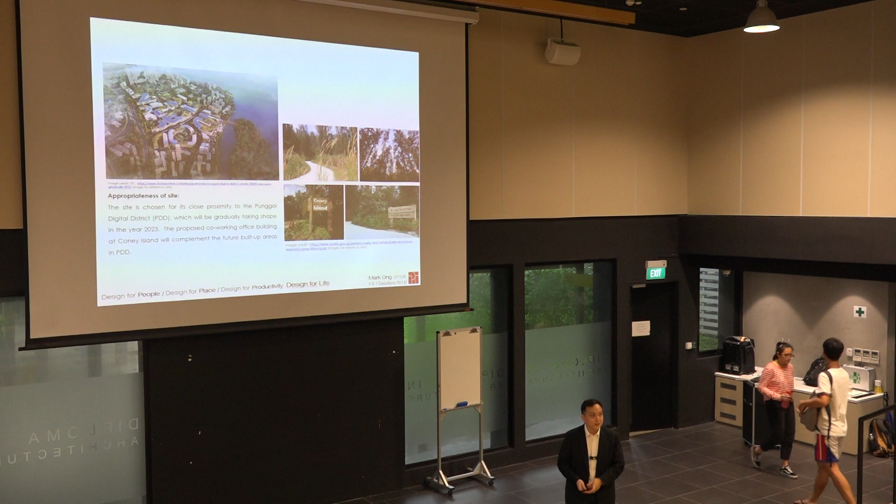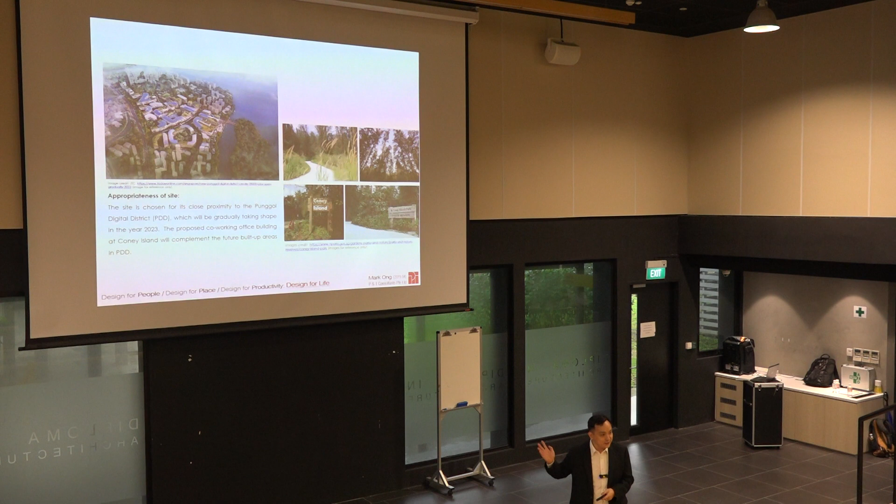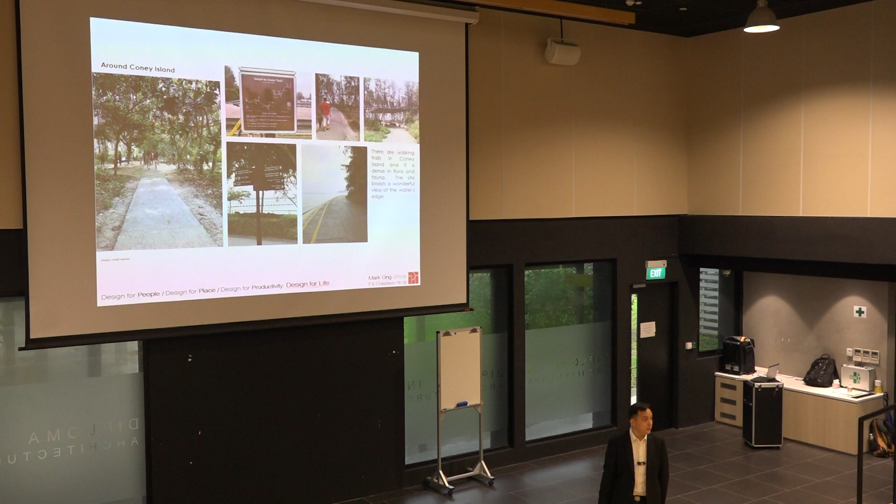Or people will also probably be cycling or jogging to work, and probably would enjoy having a shower facility if they jog or cycle to work before they begin work in a place like this. So it's actually some distance, and I think these are all included in your brief for the design competition.

This reminds me of a project which we won via design competition. It's a public housing project, we did it for HDB. It's located in Tampines. In Tampines now, they actually cleared out an open green area to plan a new neighborhood in the northern end of Tampines, which they're calling Tampines North.

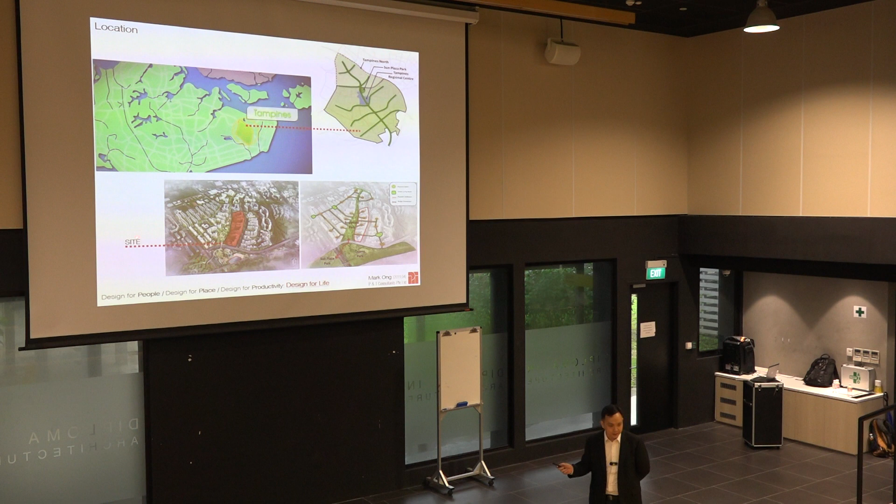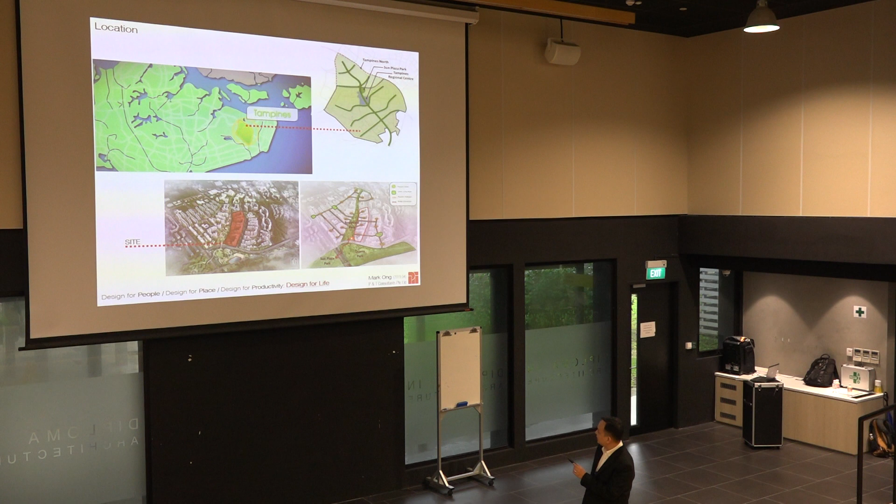One of the things the housing board is doing is designing a linear park, which they've called the Boulevard Park, that will stretch to another park connected to an existing park called Sun Plaza Park. So is anybody here living in Tampines or familiar with the area?

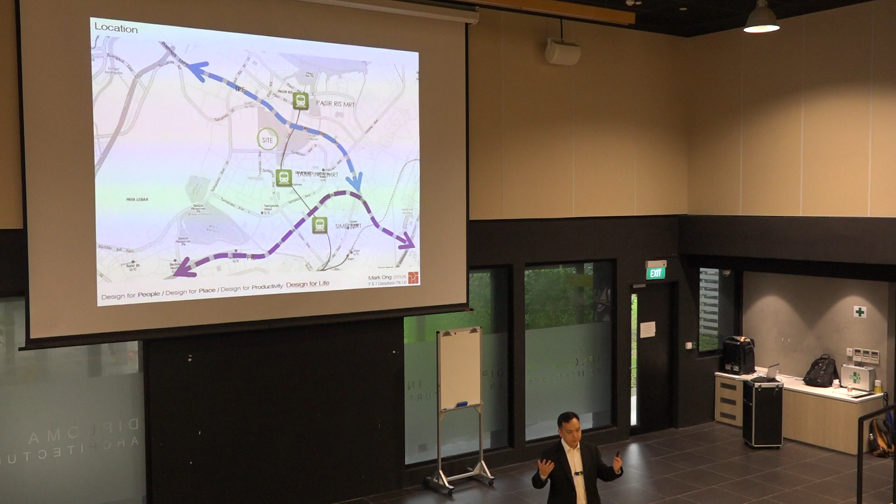The site is actually some distance from the MRT station in the town center. So it's one of those places where, if I was going to live here, it's probably the kind of place where I would use a bicycle or a PMD to get to and from the MRT station in the town center. That's why I thought it's appropriate to use this project to illustrate how certain ways of getting to and from a site would be useful.

So this is the site, from the URA master plan. This is the site, this is the linear park that they have planned, this is another park they are planning, this is Sun Plaza Park in Tampines, and here you see Tampines Town Center.

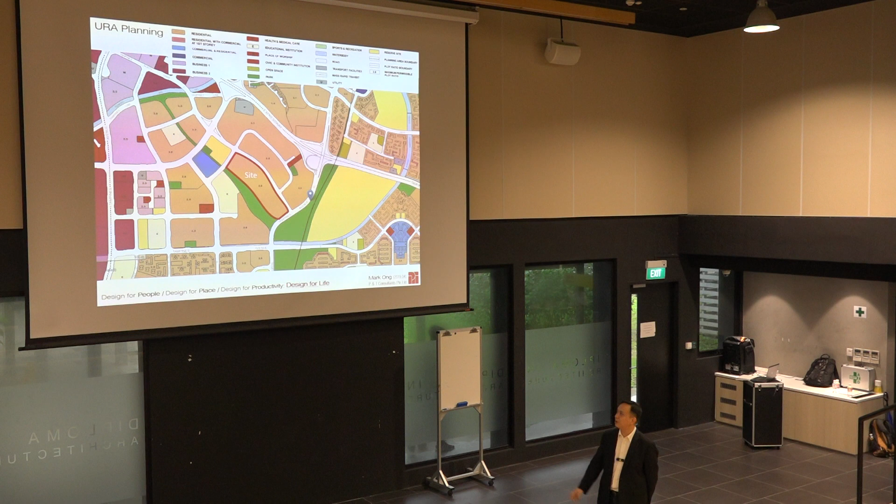So it's probably a 15-20 minute walk as well, or if you're using a bicycle. We thought a lot about how one goes to and from the site when we were designing it during the design competition - what is the experience of going from the town center and, let's say, using one of those bike sharing platforms to go from the town center to go home.

So when we were designing the site, we thought about it in a few ways. First, of course, we enjoyed the frontage - this is our site, we enjoyed the frontage along the Boulevard Park itself. And so what we wanted to do was create our own secondary boulevard park within our site.

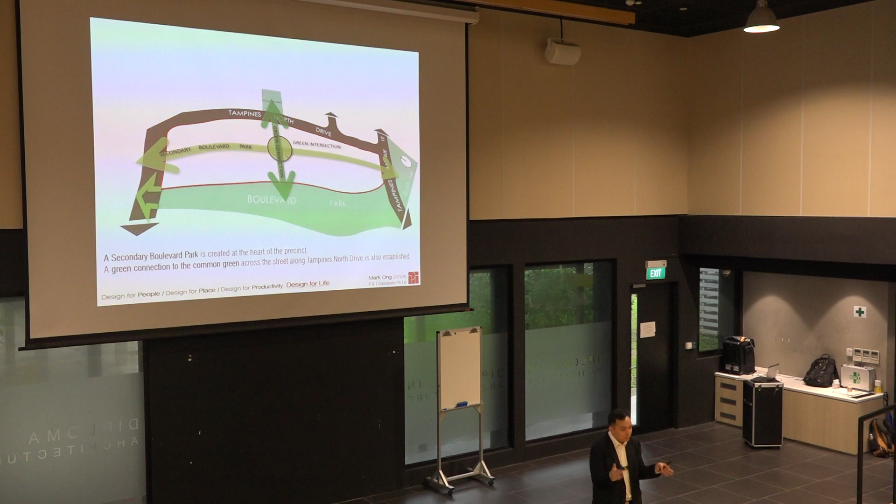We also found out that the housing board was planning to build a common green across the street, so we decided to build a green connector that bisected the site to create an intersection. But we did not want this path to be just a path or a small narrow walkway - we wanted it to be a space wide enough that you can actually define the space with buildings.

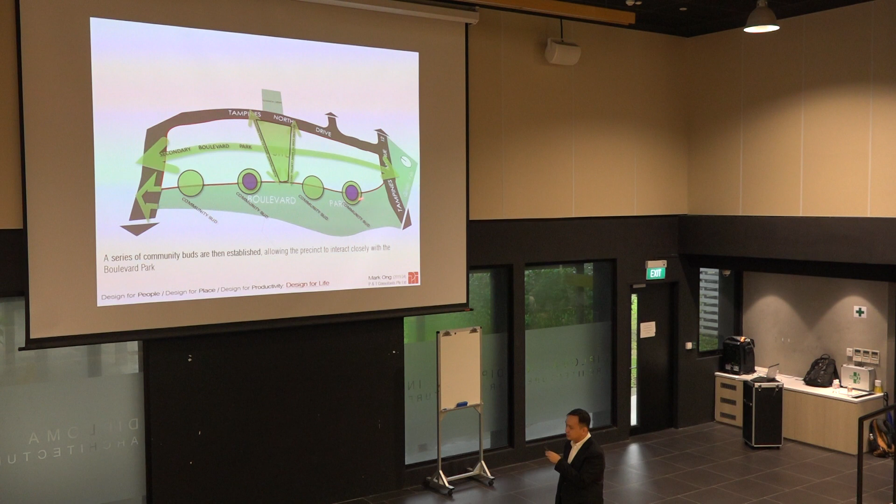And then what we wanted to do - there's a cheesy term from the housing board, they called it a community bud. They're essentially activity nodes or areas by which, as one uses the Boulevard Park, you can introduce certain types of activities. HDB required us to do 2.

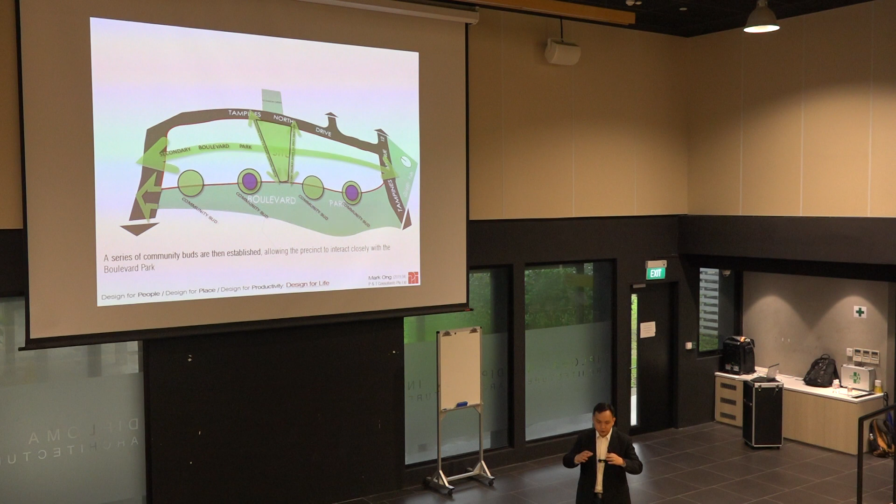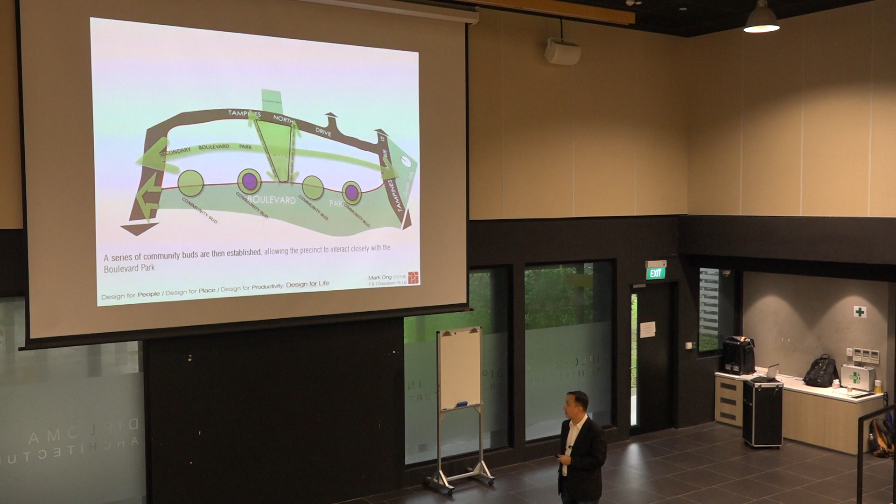We proposed 4. The idea behind these areas was to use the edge between our site and the Boulevard Park, where we can introduce activities to greet people and in a way blur the line between what is housing and what is park. Our idea was to wrap a series of residential blocks around each area to define the space.

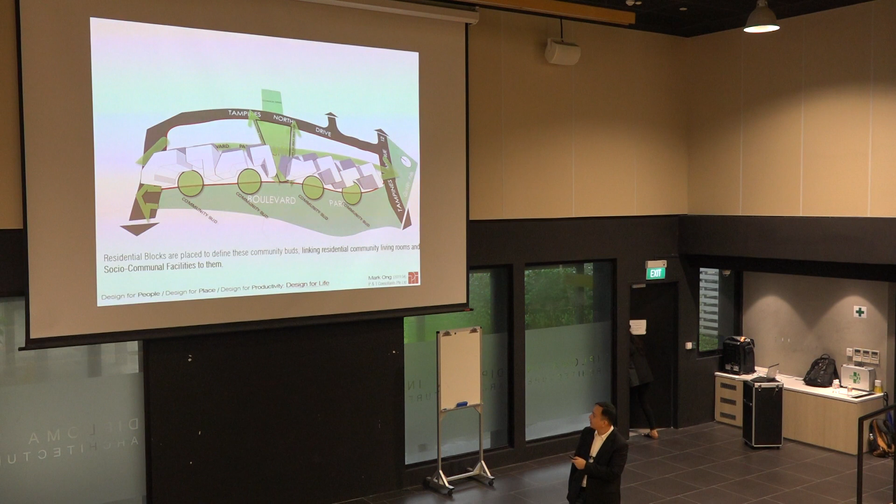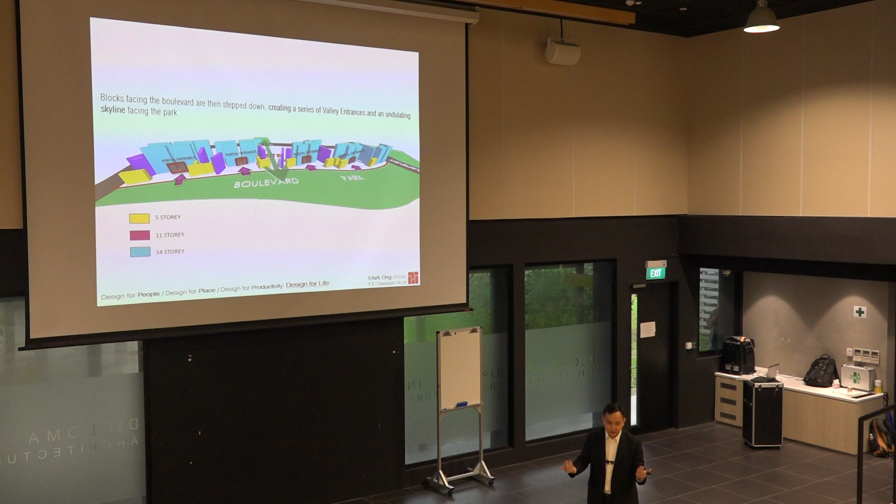And then from there, each of these courtyards will have portals that welcome people into the secondary Boulevard Park, into the second row of blocks directly behind it. So the other thing we did when we modeled it in 3D was have the blocks step down from the maximum height of 14 stories, terracing down to 11, and then to 5 stories, so each area feels like it's enclosing a defined courtyard.

So, sense of arrival. When we go back to your Punggol site, think about sense of arrival. Think about if I was going to jog here, if I was going to cycle here, if I was going to take my PMD to go to this place—how do I get to this place, and how will it feel to get to and from this place?

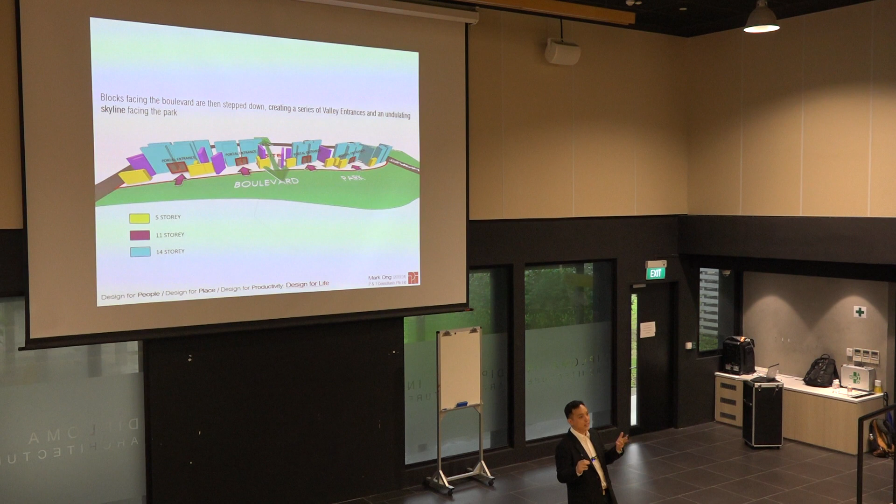Another specific thing I'd like to plant in your minds when you're working on the project is to think about the relationship of the site to the water, because in Coney Island your site is next to the water. So how do people go to and from the site into the waterfront? If I work there, it's easy to design a building that opens up to the water, but it becomes a question of whether you want to design your building such that it invites not just the people working there, but others close to the water too. And what does that do to the site?

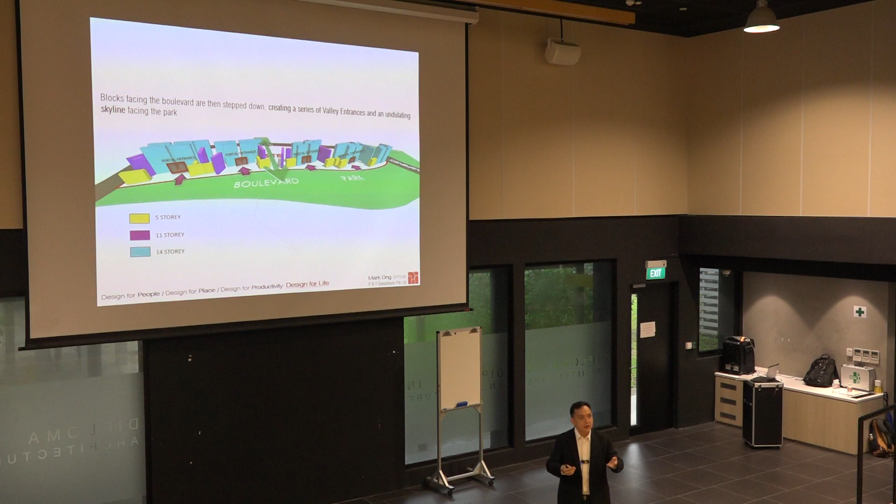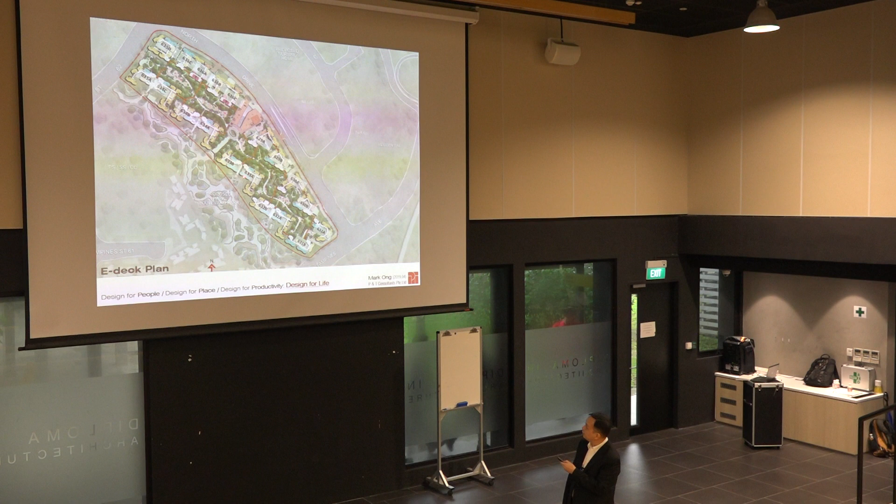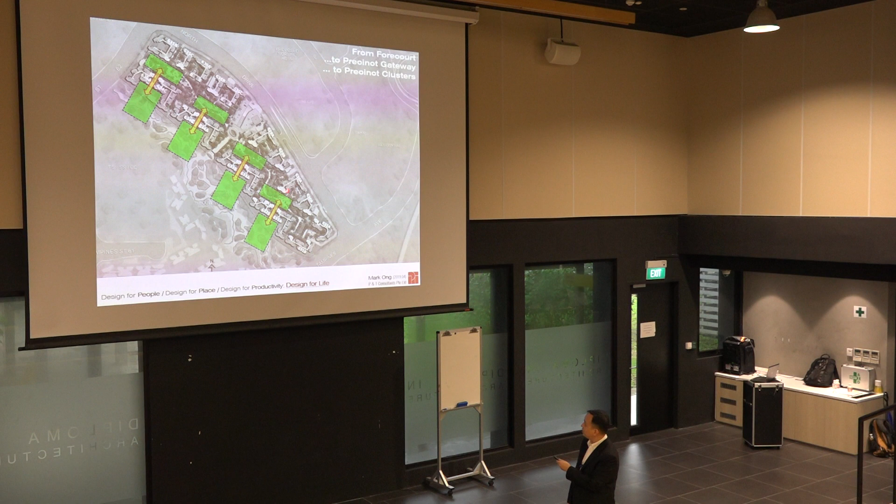Okay, so going back to this project, this is how we basically define the buildings. We define them as a series of U-shaped clusters of blocks facing the Boulevard Park. The idea is that you have a forecourt that's married together with the Boulevard Park, each one with a portal leading to a courtyard in the middle of the site.

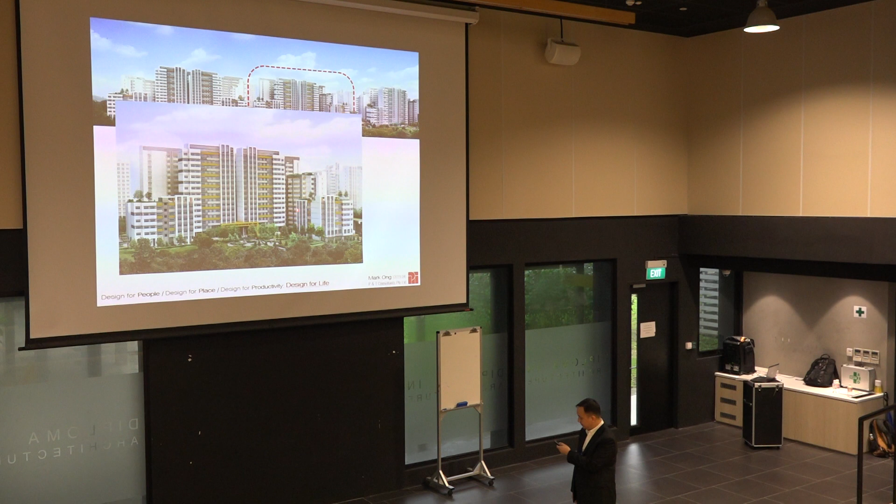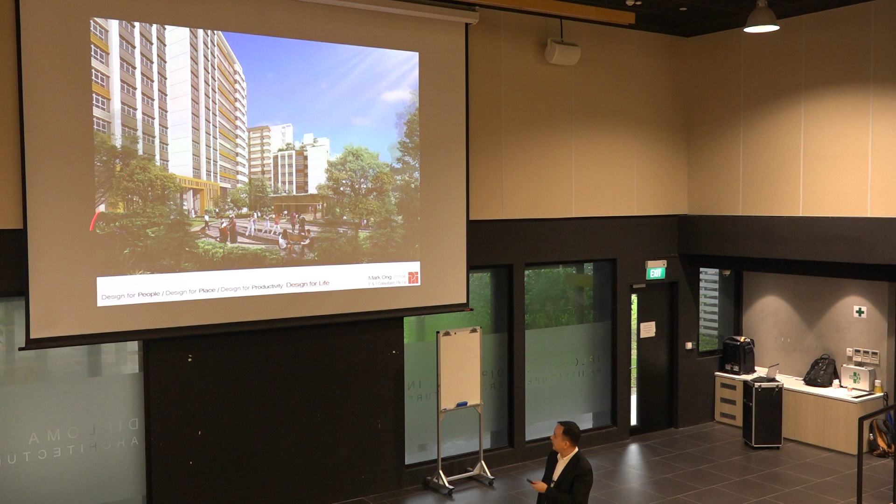When you break it down, each cluster is a block that rises from a low-rise building to a mid-rise building with roof gardens up to its highest point, with a courtyard in the middle welcoming people. So the courtyard is designed to welcome people—it's got activities, it's got spaces. Here is where people can gather, do their morning Tai Chi, and the elderly can do their line dancing at night. Then from there, they walk into the site.

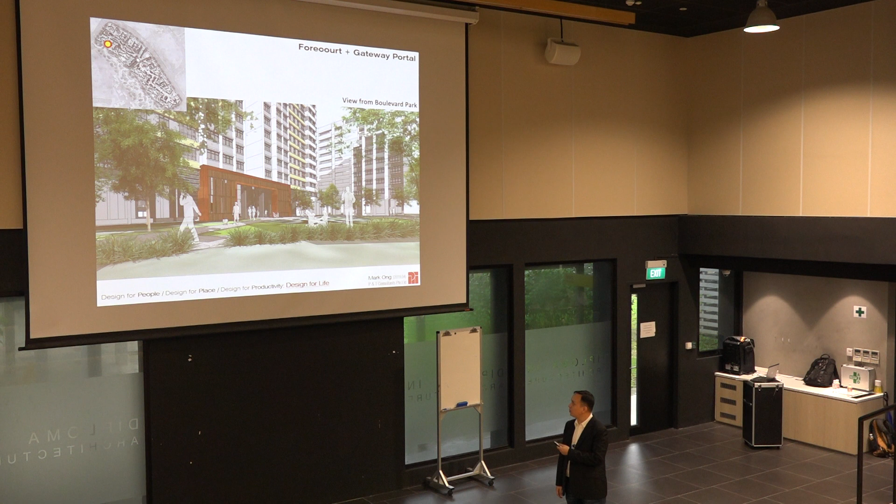And then once they walk into the site, we designed a portal. We thought about what happens when you walk through that portal. So we designed it with a double volume living room space, where you're greeted with a CLR—a community living room. It's basically a jazzed up void deck, with seats and finishing, places where people like yourselves can do your homework, meet your friends, or wait for them within the block while messaging them, having a comfortable place to wait.

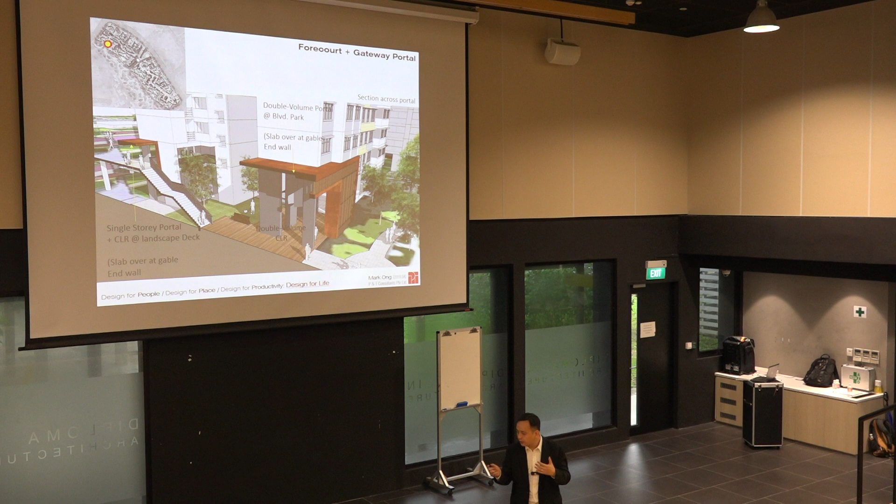And then from there, you can take a landscape staircase up to the landscape deck of the building itself. So that's designing for place—thinking about how one place, one site connects to another, how one arrives at the site, and if there are assets in the site itself, how does one maximize them?

I'd like to go through a couple of projects, and as I go through them I'll also touch on some of the items I spoke about when we talked about designing for people and designing for place. So our journey—P&T—when we started to work on PPVC projects, it started when we began working on the student housing residential halls for NTU. These are the North Hill residential halls.

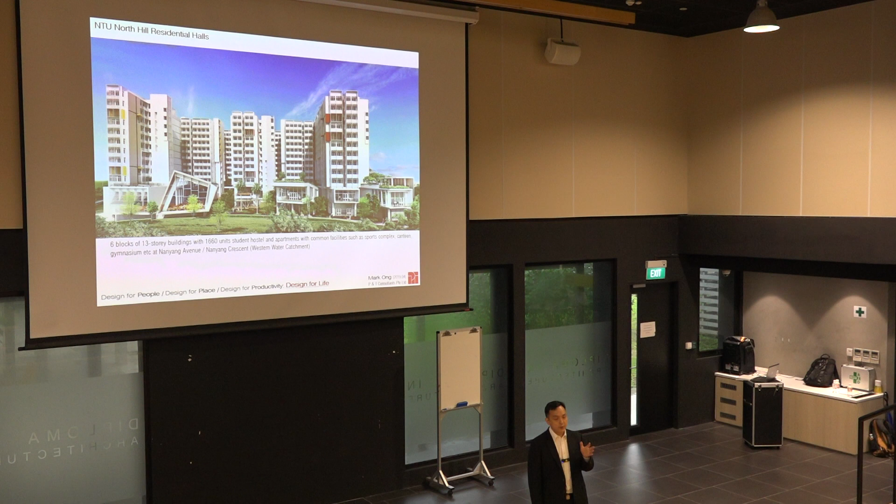They're basically 6 blocks of 13-story buildings, about 1,600 over housing units for students. This project gained a lot of mileage because it was one of the first projects to use PPVC technology. This one used a steel system, a steel PPVC project.

So this is what it looks like in 3D. There are basically 6 towers sitting on a podium with a landscape deck. 3 out of the 6 towers actually adopt a cruciform shaped plan.

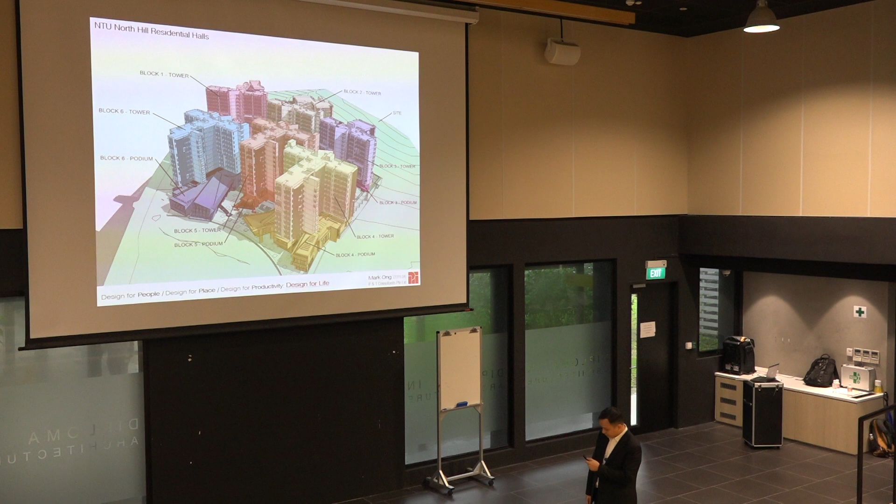After we did the whole massing in BIM, here we were still using Revit. Today our office is actually using ArchiCAD. We ran the entire site plan through computational fluid dynamics, CFD, to basically test out how the site responds to wind.

There are very many ways to interpret data. Sometimes this process is normally done together with a specialist who runs through the data. You don't just run the simulation, you also need to extract interpretations from it.

From here, the normal instinct would be red is bad, blue is good. But actually that's not true. The way it's interpreted is that what we're watching out for, in this diagram, is to look at pressure differentials. For example, if the pressure here and here is big, it means the wind is flowing through, because that building is basically absorbing and enjoying large amounts of wind, since you're seeing large pressure differentials in the way the wind responds to the building.

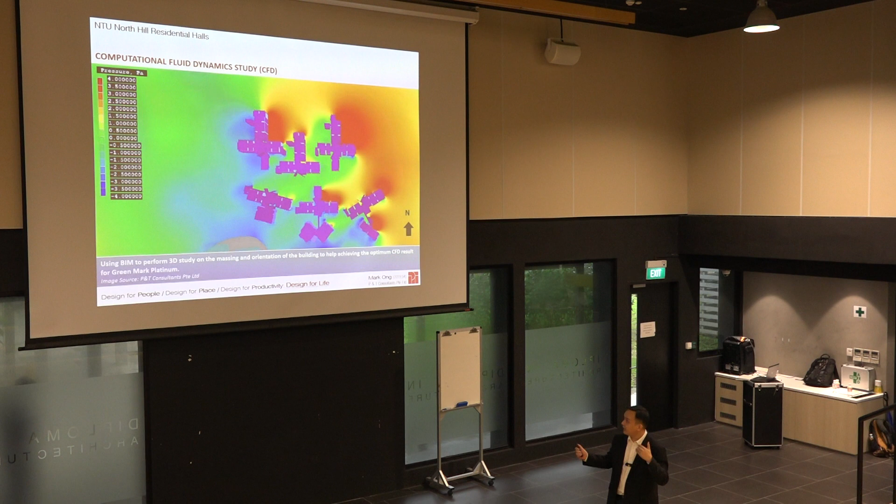If you go through the assessment of green mark to score points using CFD, there are lots of criteria, both at the site scale and the building scale, down to the unit scale of how wind actually passes through. You can use BIM software, regardless of platform, whether Revit, ArchiCAD, or whatever, with plugins available to simulate how it behaves in terms of building orientation and how it responds to wind.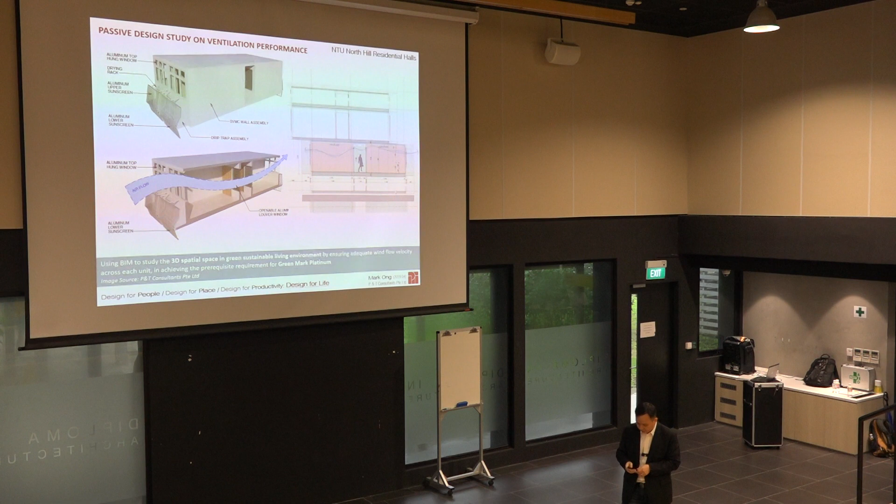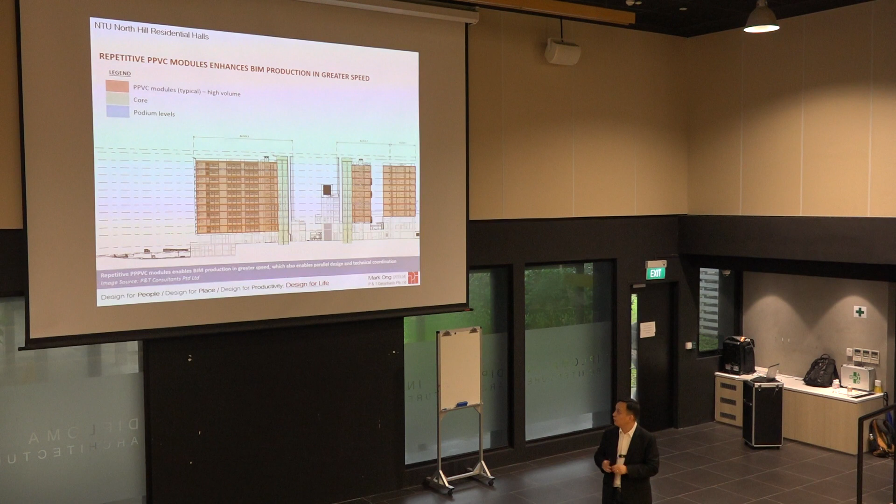When we were designing NTU, we adopted a hybrid system, in that the podium levels and the core, the tower core itself shown in green, the lift core and staircase, were done using traditional methods of construction. The student housing modules and units themselves were built using PPVC.

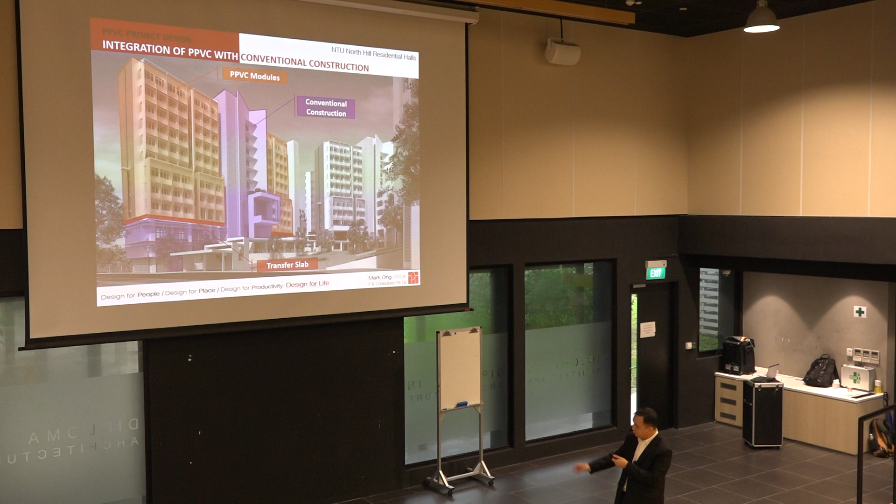As I mentioned, this is what it looks like in 3D. The tower area, the core with the lifts and staircases, are all done using conventional construction, as well as the podium on which the tower sits, whereas the student housing units themselves use PPVC modules.

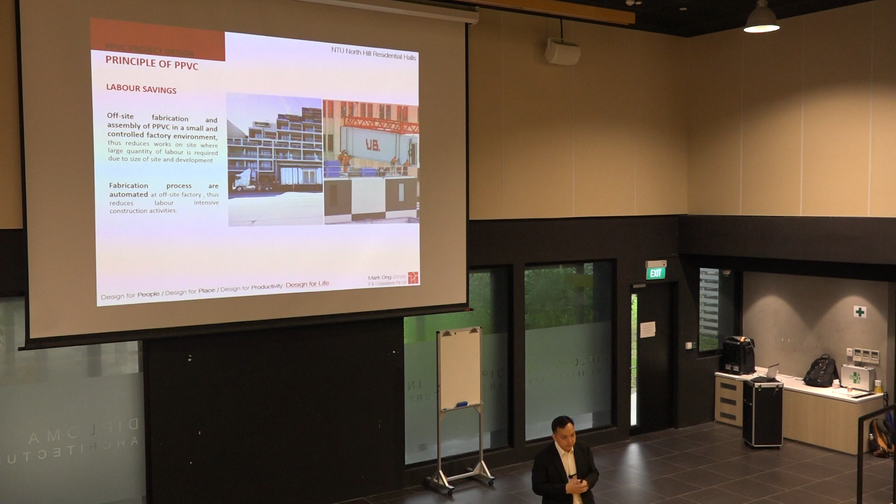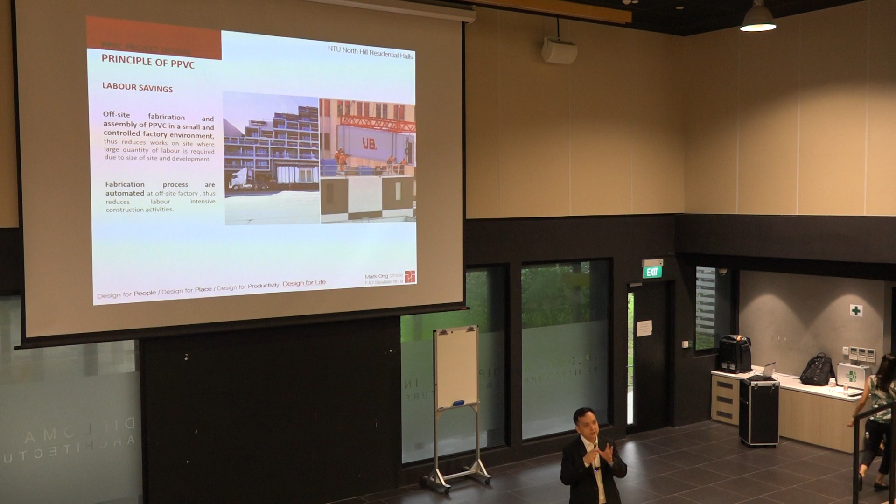So I just want to go through some of the principles of PPVC. The key driver is to basically extract savings in terms of labor, because most of the labor is done in a controlled environment in a factory, lessening the amount of labor needed on site. As the industrial process evolves, it will involve more automated fabrication systems, which will improve the overall quality and safety of production.

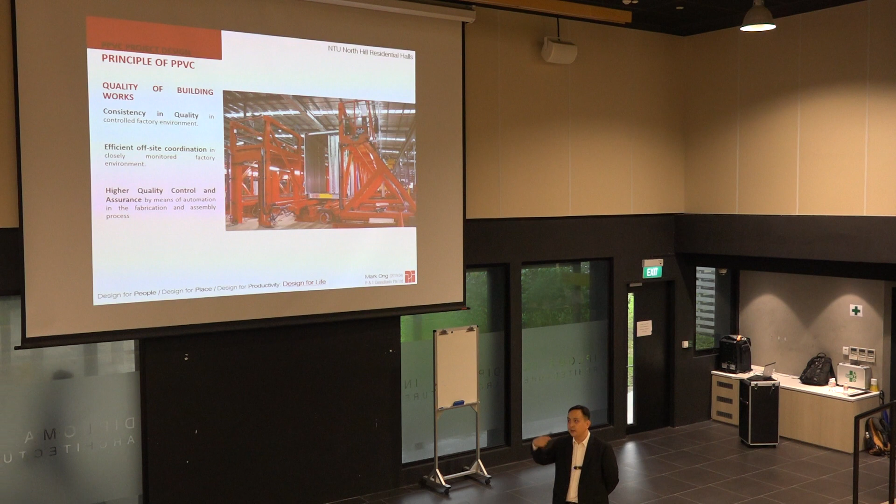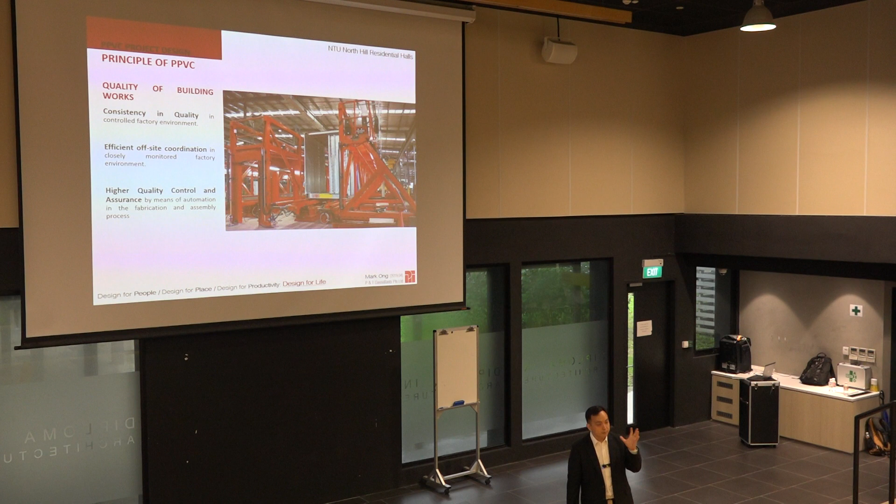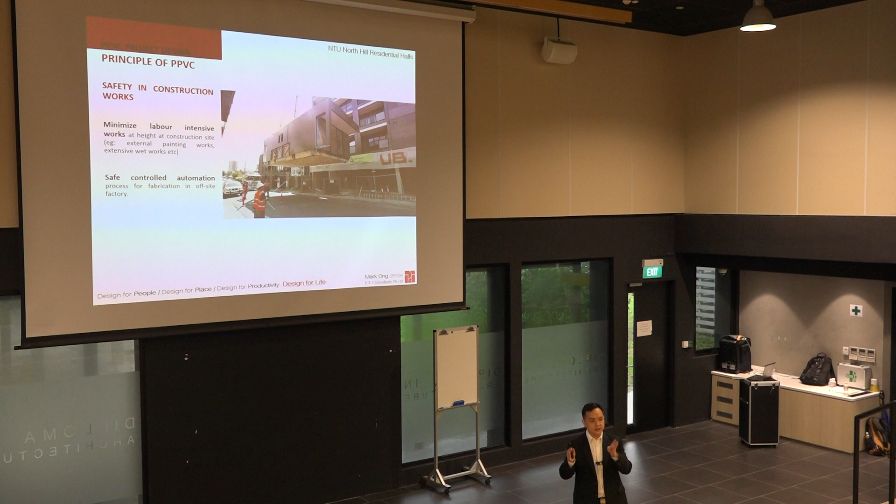Because you're building these modules in a controlled environment, in a factory, not under the sun or rain like outside, you can achieve better outcomes in terms of consistency and quality. You can coordinate a lot of things off-site much better, giving much higher levels of quality control. And you get safety improvements because you have less manpower on site, less wet pour, less activities, since you're transporting many construction activities that would otherwise happen on site, off-site.

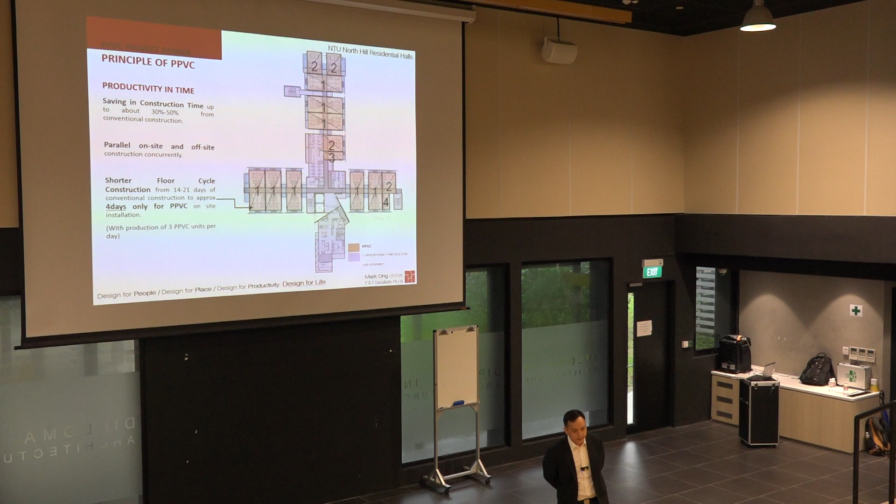For this particular project, we saw a lot of gains in terms of productivity, about 30 to 50%. This was actually the sales talk. Actually it's a little less than that, but still significant gains. Our experience using more recent systems, we count not in terms of time or months saved in construction, but man hours per square meter in terms of productivity.

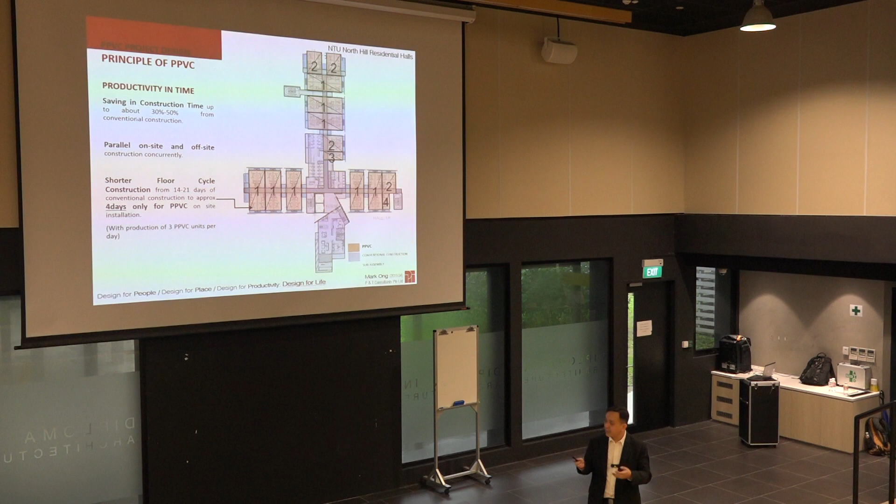The idea is to shorten the floor cycle of construction from 21 days traditional to 4 days when we use PPVC construction. But this number actually swells up in actual practice because you have to spend a lot of time managing the logistics.

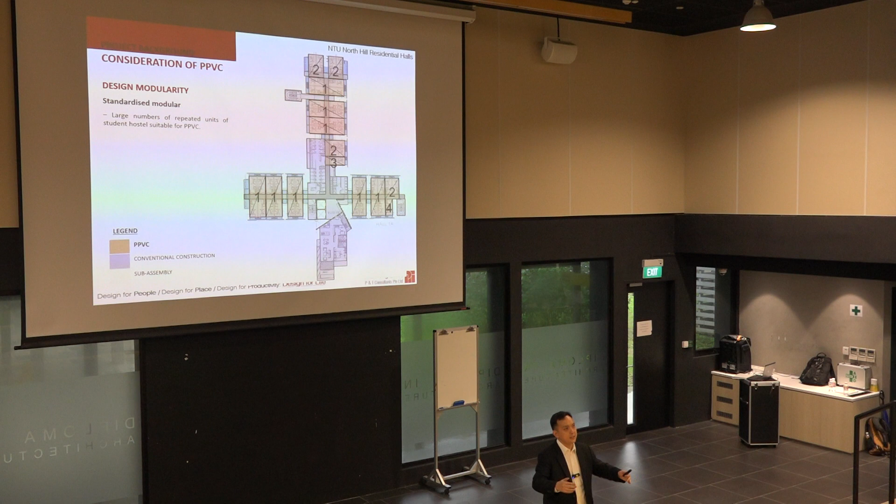Now I want to go through some of the considerations we need when we want to do DfMA. First is the idea of modularity in design, having repetitive designs that you can replicate over and over again. We have to think of construction less as the traditional way of building on site, and more as a manufacturing process, almost like mass production.

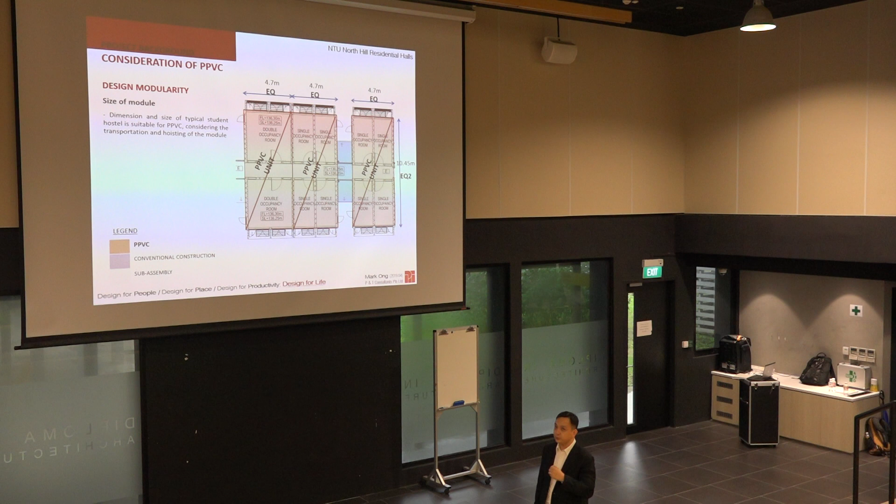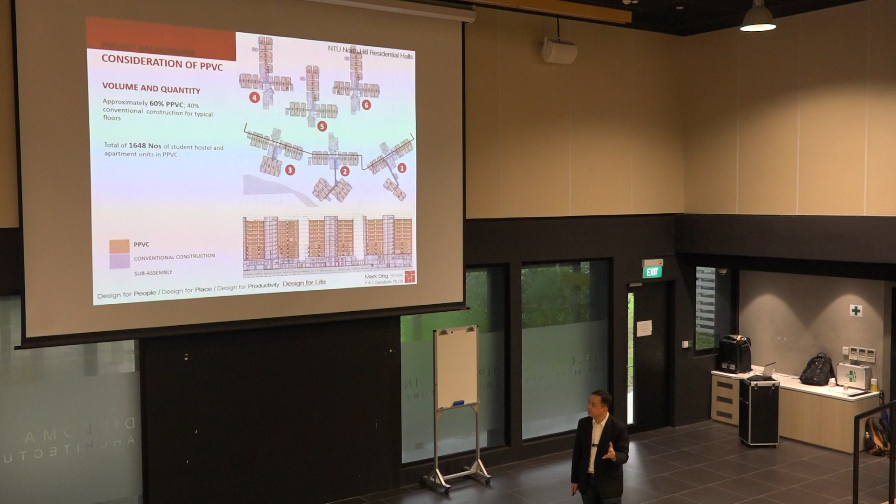The other thing to consider is the size of the module, because this module is built in a factory off-site and has to be transported, so you have to control the size for how it goes from factory to site. Also, to achieve economies of scale you should have enough repetition of the modules, since the system itself is more expensive compared to traditional systems. The higher the number of repetitions, the more economies of scale you achieve.

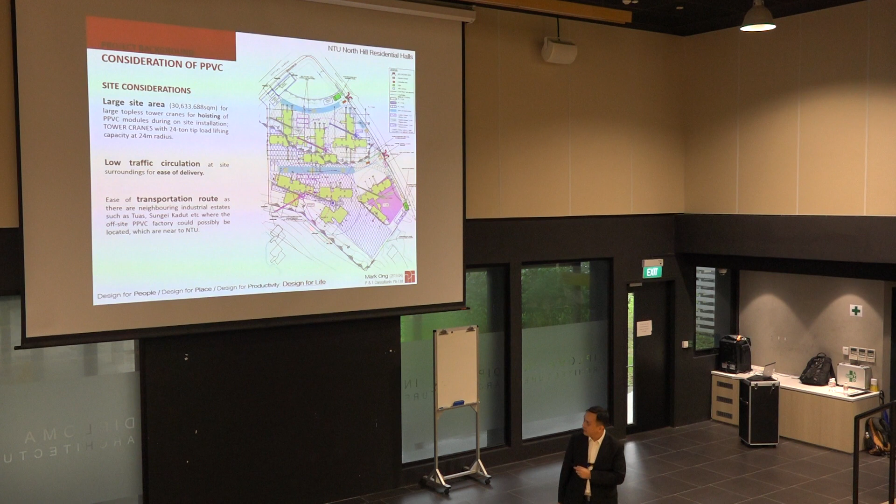Areas with low traffic are also important, since you have to transport such large objects through traffic. Another factor is the capacity of the tower cranes. For this particular project we used tower cranes with a 24-ton tip load, based on a 24-meter radius, so the crane can grab this very heavy object and hoist it into place.

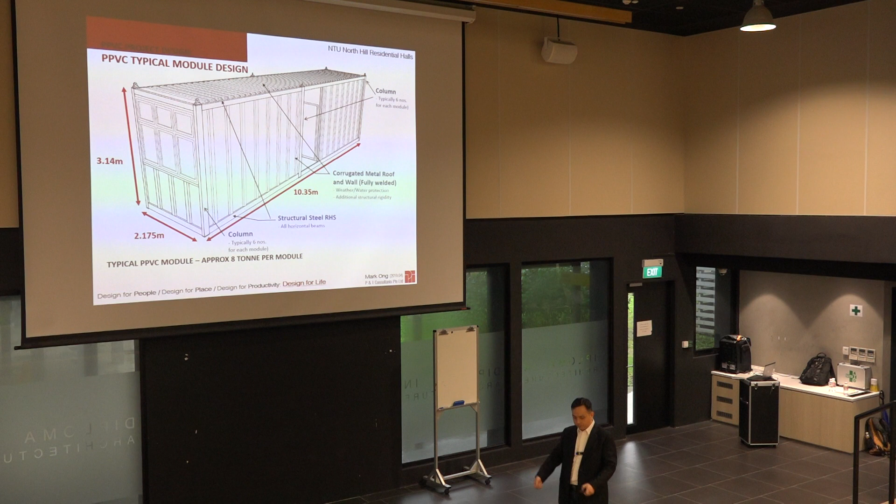For NTU, the module I showed you earlier is about 4-plus meters, broken down into 2 modules. Each is about 2-plus meters by 3.14 meters in height, about 10.35 meters in length - this is for NTU. Later I'll go through how it's practiced now, since the allowable size is slightly bigger than this.

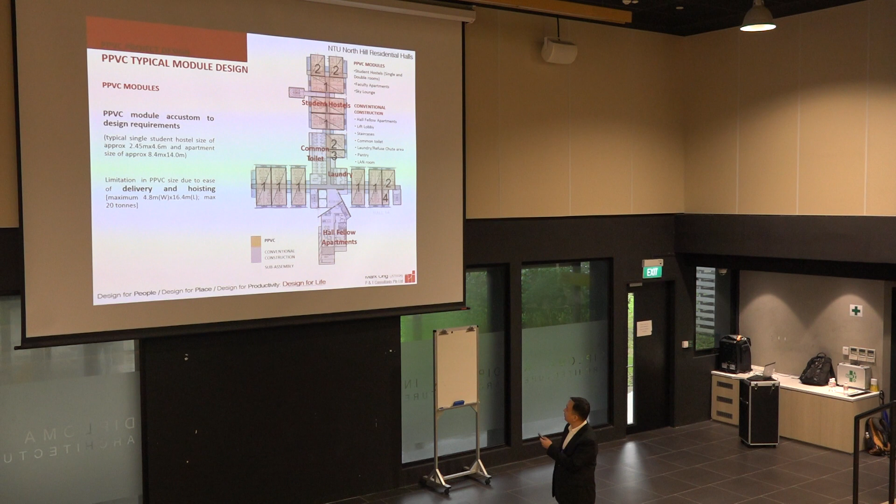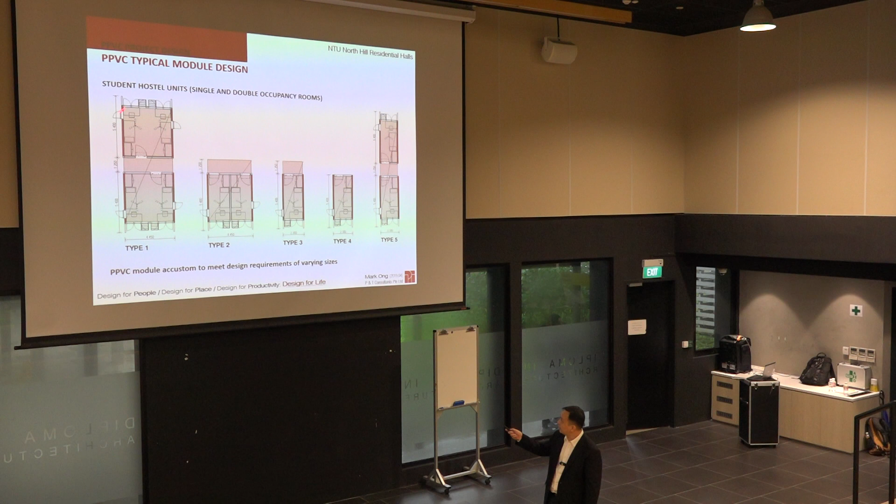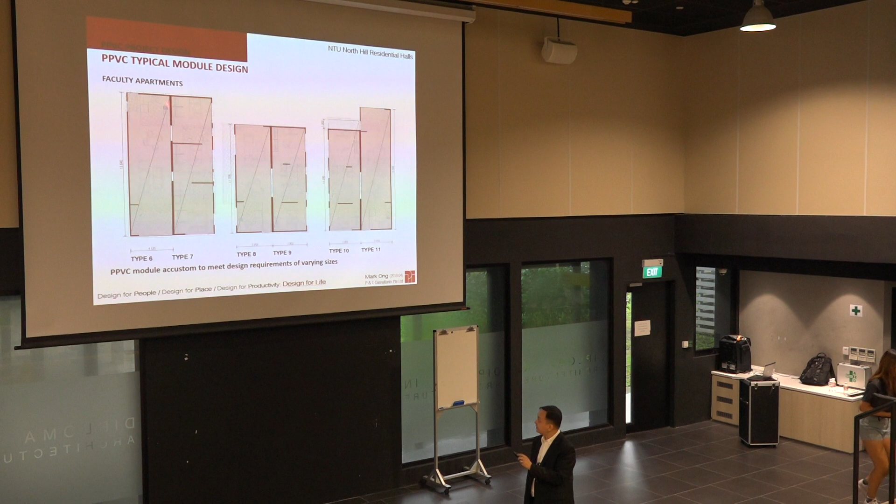The bigger components, shown in purple - the toilets, laundry areas, staircase, lift - were done using conventional construction, while we used PPVC construction for the units. We worked out a few different types, with each housing unit slightly different based on how much rent you pay and whether you want your own room or to share with somebody else. We also did apartments for faculty members living in these hostels.

This is what it looks like when you assemble one set of units together. We think about how the whole thing gets assembled, from the key components - the floor, the walls, the ceiling, the slab above - to your walls, windows, and even the window treatment.

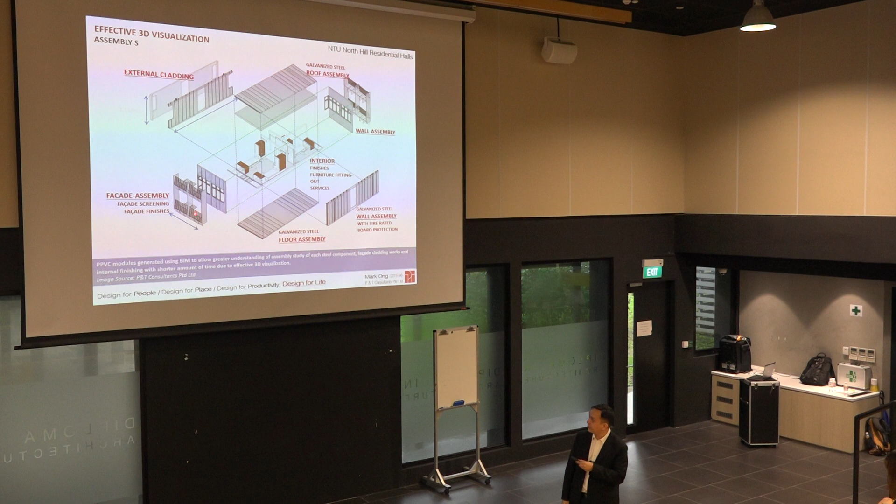Because we had to cater for students drying their own clothes inside their units, we designed clothes drying racks with perforated screens so that as you hang your laundry, your neighbor won't see what color underwear you wear. They're installed in that manner.